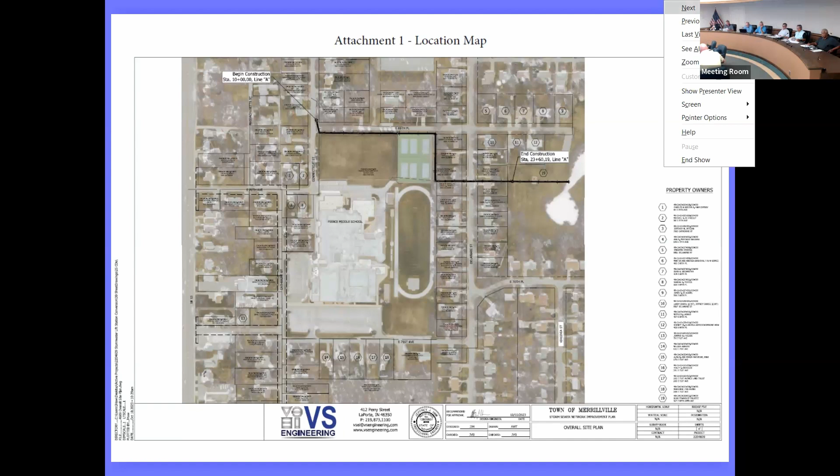Like Matt Lake said, I'm Tim Hollinsworth with VS Engineering, and we did the design of this project. On the screen you'll see the location—it's just east of Broadway, State Road 53, and north of 73rd Avenue in Merrillville. Like Matt said, this runs down north of the middle school and connects to Skinner Pond. I'm waiting to get that page—next slide, please.

Very similar to what Matt said, the summary is to eliminate that lift station and replace the infrastructure with a new pipe, making it into a gravity fed system.

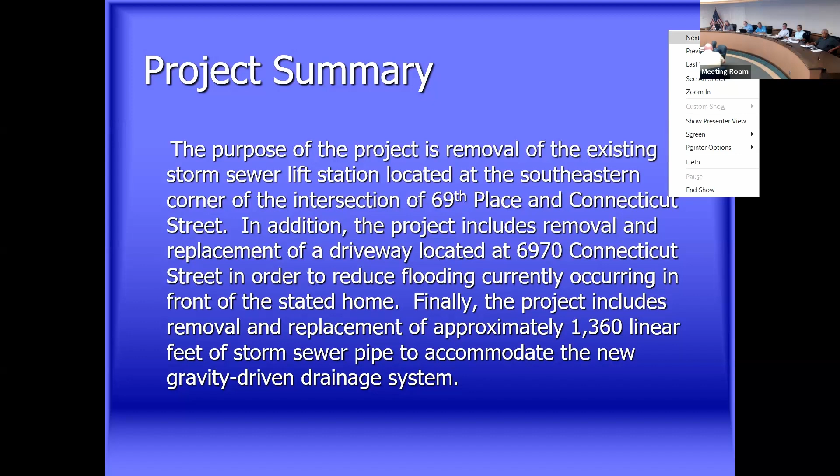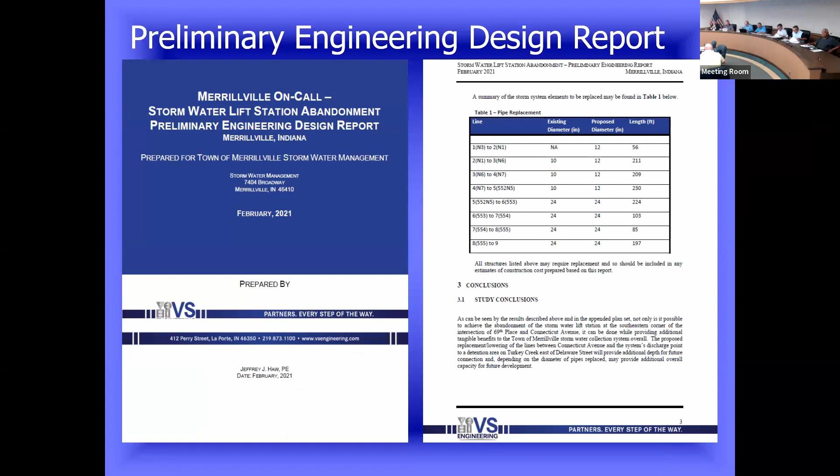On the screen now is the request for the funding application. This gives a lot of the same details we've provided and listed here. And this is the engineer's report we've done to verify the need and the proper solution. Next is the construction estimate that Grimmer provided, utilizing the quantities we calculated throughout the design process.

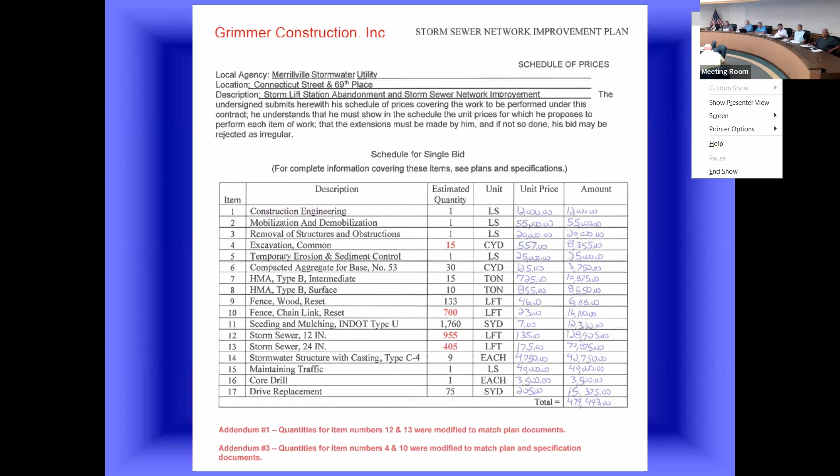One thing to note is that we are tying into existing structure. We're not replacing unnecessary things. We are trying to utilize what's out there and do best by the dollars provided.

Some additional information captured here is some drainage areas that were really poor that the pump wasn't able to capture. Putting in this gravity fed system will help capture those, helping these two residence locations on Connecticut Street to keep it flowing. It'll also help preserve the infrastructure of the street by keeping the water off of it.

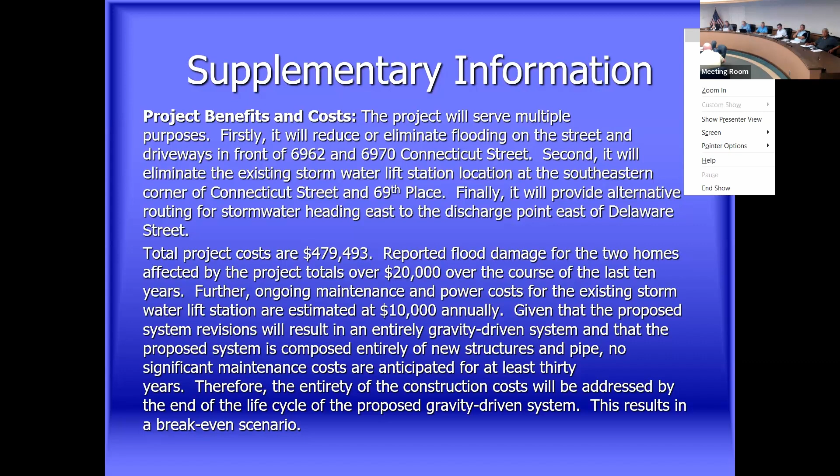Another thing to note is the benefit of eliminating the lift station, saving the town revenue on ongoing maintenance and eventual complete replacement of that as well.

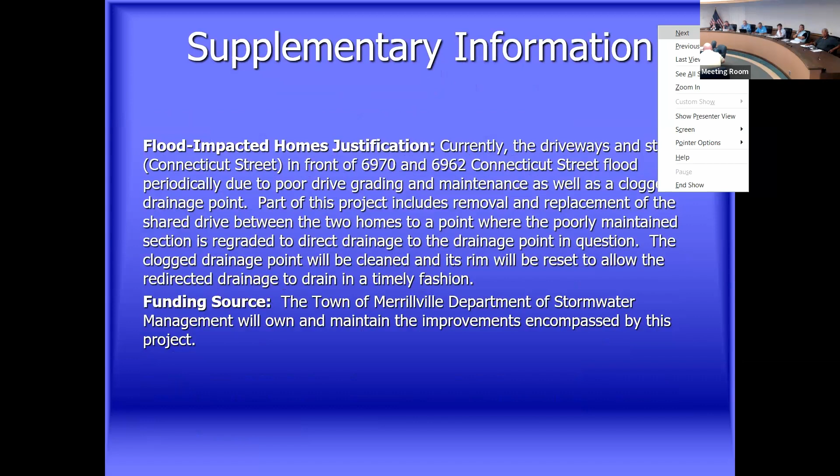Other things being taken into consideration are some of the residents' drives that are impacted by this flooding. So not only is it helping the features of the road, it's also helping those residents preserve their infrastructure. And the town is already committed to doing this, with it already under construction.

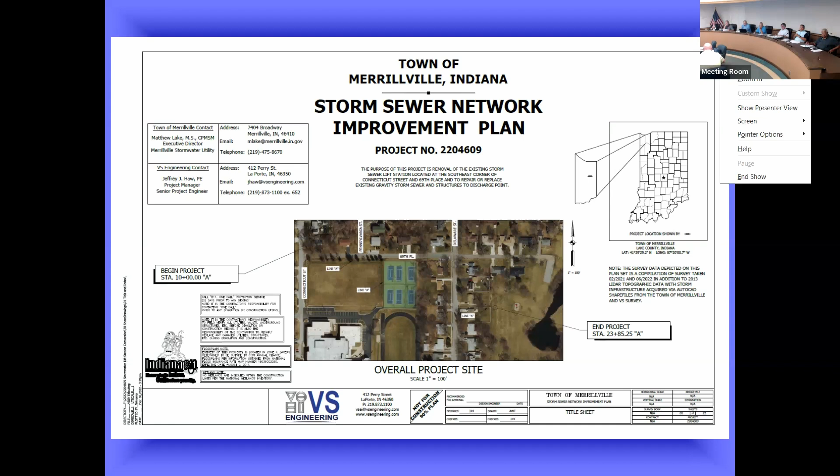So now in front of you are the plans for this project. This is the title page we've used, highlighting the location. And the next slide is going to show more detail of the route.

We worked closely with the school system and their board, and they were generous to grant us easements in order to relocate some of the infrastructure, but they want us to be east of the tennis courts.

We've also invested our stormwater dollars into all the studies and engineering to this point. The engineering's done — correct, it's all done. Grimmer's already on site and constructed. So we're asking for 50% of construction costs.

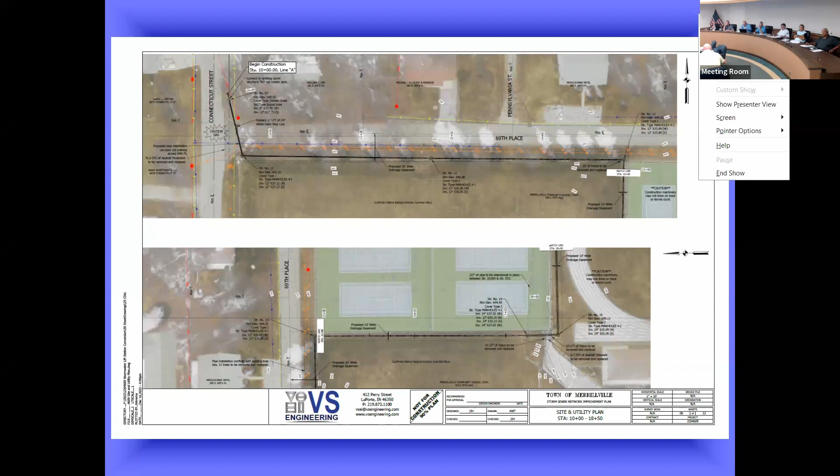Also on that easement discussion, we've worked with Ross Township as they own the park. So we've worked with them on getting the easement there, as Matt Lake stated with the school, ensuring the school's property isn't damaged with the tennis courts there, and replacing in kind the fence that will have to be removed.

So Matt, the township and the city — this is kind of the DMZ, for lack of a better description. We're abutting Ross Township and the town of Merrillville. We're going through school property first, then crossing Delaware Street into another property where Skinner Pond is, owned by Ross Township trustee Eric Blackman. They've been great to work with.

So is the township portion of this where the new water's going, or is this helping the new water go to Ross Township? It was already going there to begin with. Okay, so we're resetting the infrastructure so it actually has the elevation to drain by gravity.

We're trying to follow the exact same path, other than on the other side of the tennis courts, making sure we had easements into the Skinner Pond area. So we're taking the existing system and resetting it with the elevation so it can go gravity instead of relying on this utility valve. Like Tim said, we looked at lift stations and other options, but the cost and reliability just didn't seem like something we wanted to go in that direction with.

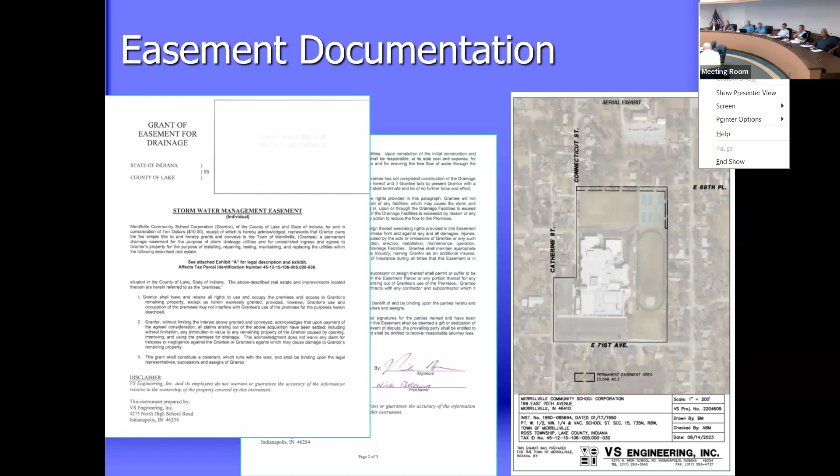Thank you. And last slide, please. So the existing sump discharges to where? Same place, same place.

What's the exact orientation, where does Skinner Pond discharge to, where does it outflow to? The pond goes north into Merrillville High School, travels through their infrastructure, and ends up at a railroad corridor where it outlets, just on the west side of I-65.

So there's really no differential between what's received now and what's going to be received. It's just going to reliably get from the system, from A to B.

Without flooding everybody in that intersection and the school, and making sure they have access. Has it been flooding because the pump station hasn't been working correctly? That's primarily the issue. Who's responsible currently for that pump station working correctly?

That was kind of a makeshift system that was put in by Public Works many years ago. So we're trying to correct something. I don't know why they did it and why they didn't invest in something like this. We did have another engineering firm look at this and they said it was almost impossible to do.

We hired VS to do a study too, because I didn't believe it. And sure enough, they ended up saying yes, you can gravity this from A to B. So reliable drainage is key for this area, not only for the school, but for the residents.

And then you've got Merrillville High School just on the other side, so you've got a lot of moving parts. Merrillville High School is to the north. Can I get an aerial put up? I just want to see where it is.

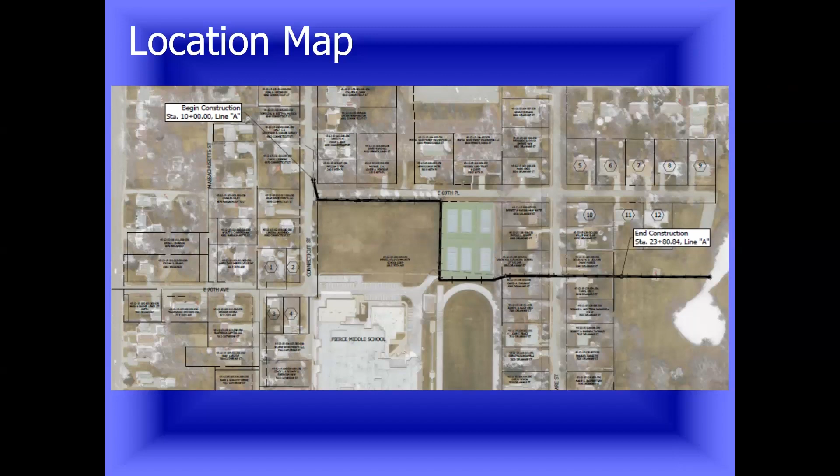You guys done, or is it question time? You're putting a new gravity storm pipe in, is the pipe size increased as part of this? In sections, yes, but that's mainly to help the slope. Any other questions for these young men? Outstanding, nothing for me. No, that was fine. Thank you very much.

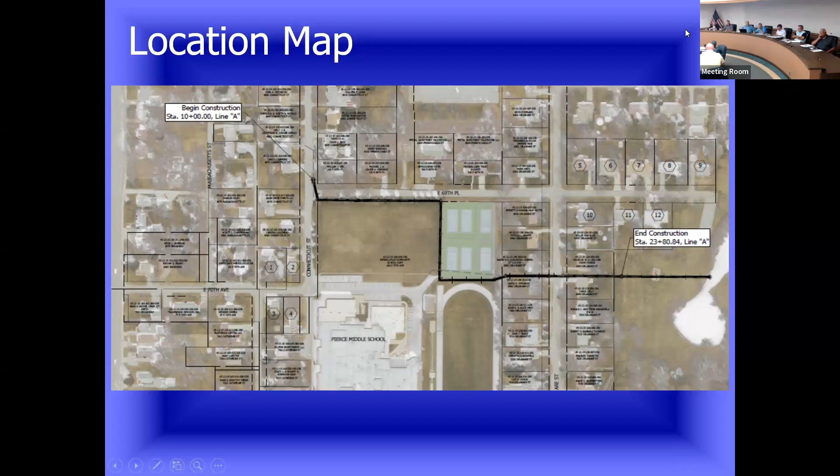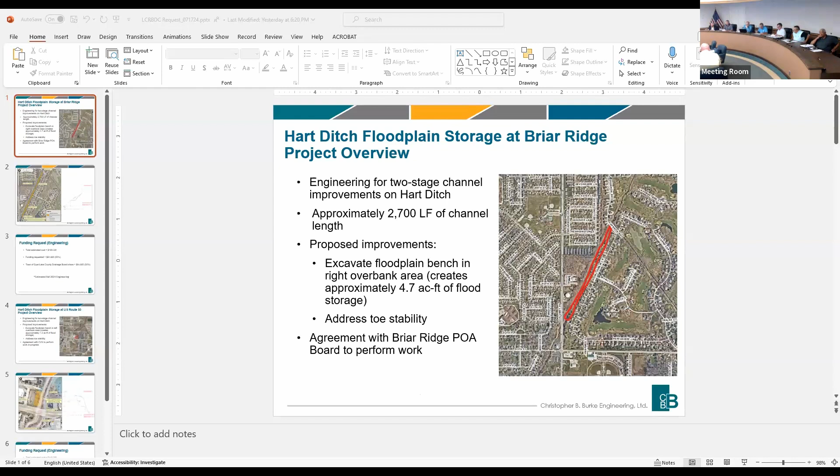Moving right along, next up, representing the Town of Dyer, engineering for Hart Ditch floodplain storage at Briar Ridge and floodplain storage at US Route 30. Are these two separate projects or packaged together? They're two separate projects but will probably be packaged together. They did a study about two-stage ditches continuing from the work done by Town Hall, and these were the areas identified as most beneficial given property rights and accessibility. I'll let Thomas, who already has it up and running, present.

Good evening, I apologize for not being there in person. I'm Thomas Burke with Christopher Burke Engineering. So what we have is a map of one of the two areas we'd like to pursue. The two-stage ditch project, as Dan mentioned, was successful before near the town hall.

Calumet Avenue is the north-south street, 213th down here, Briar Ridge Country Club and Main Street up here. We're talking about a 2,700 foot length along the east side of Hart Ditch on Briar Ridge Property Owners Association land. We've got about 1.5 million gallons of new storage created by this project. We'd also address stabilization of the toe of the ditch, which has been eroding, and we've talked with the Property Owners Association, who agreed to allow this work inside that easement. The benefit shown here is a narrow area to do the work.

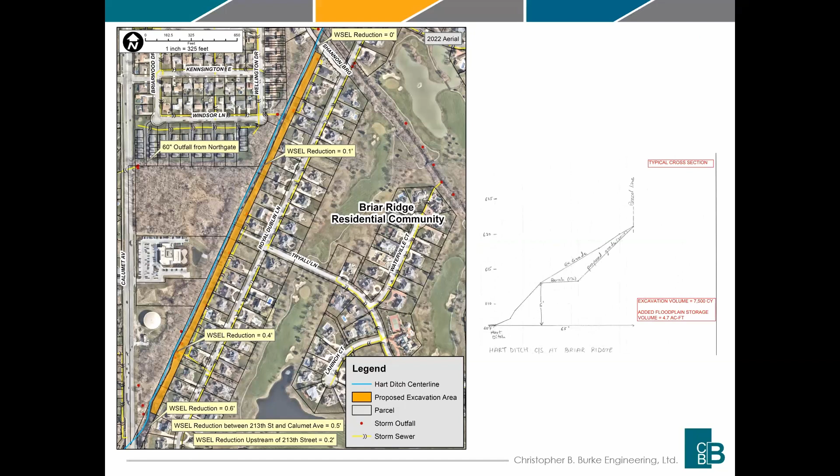And you've studied this, because the top of that does look a little iffy to me. It seems like it's making it worse—right at the property line, you're making a steeper slope. We are, but it was also going to be planted with vegetation that will hold it. It's certainly not as steep as some other areas in the ditch, but we are confident with this grade that we will be able to hold 3-to-1 and hold the bank easily.

Okay gentlemen, any other questions with this particular? From the center of channel to the edge of the property owner's land, what is that distance? 65 feet on average. To the center? Yes, more or less, though it depends—there's a channel that comes in here. In general, and I apologize, that's 65 feet from the edge of the bank, not from the center line, so it's probably like 75 feet from the center line of the ditch out to the property line.

Are you doing anything on the west side of it? We are not. We have looked at this. We had proposed doing, as Dan mentioned, we looked at a number of areas throughout Dyer and selected the most beneficial ones, as well as the ones where we could work with the property owner.

So we looked at this triangle piece here that the town owns. However, the town wants to leave this for another water tank—they believe they need to provide a future water tank here, so they didn't want us excavating this. This is the oncology center where there's already a detention pond right here. The town had looked at actually purchasing this property to make it an even wider area over here. It's since sold, but we've contacted the new owner about possibly working with the town to create more storage—that's ongoing. Some of these other areas get too narrow to really do much with, so we looked at maximizing everywhere we could, and we're presenting right now what we believe are the two best areas.

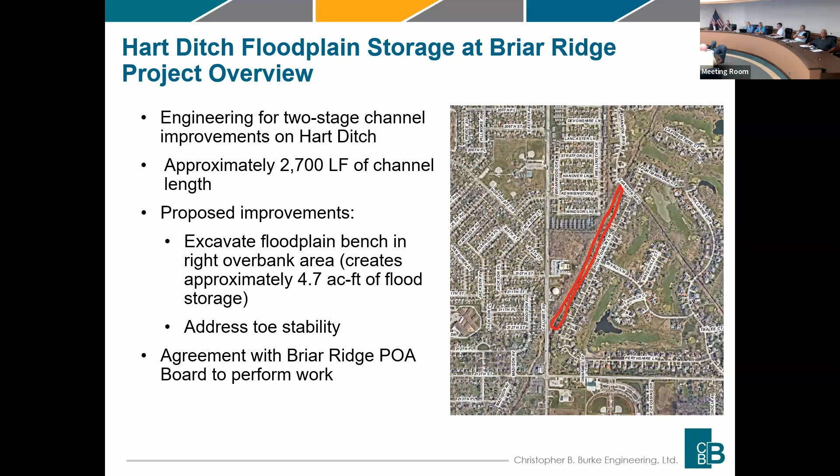All right, Mr. Burke, moving right along. The next one—here's US 30, here's Dyer Town Hall, here's... Brian, help me out, what is this? Sorry, Hart Street. Thank you. So we're just entering into the town of Dyer on US 30, the north side.

This is where we did the previous project, the two-stage ditch from the hospital up to about where the town hall pedestrian bridge crosses from town hall to the event center. This is looking at the CVS property right on the west side of Hart Street.

We looked at trying to extend this along the east side, just south of Calumet Street, but the property owner was not willing to work with the town at this point, and we didn't want to take it to where it would have to be condemned or anything else. We decided to just see if we could work with CVS, and CVS said yes, they're willing to work with us—give us details and we'll look at proceeding.

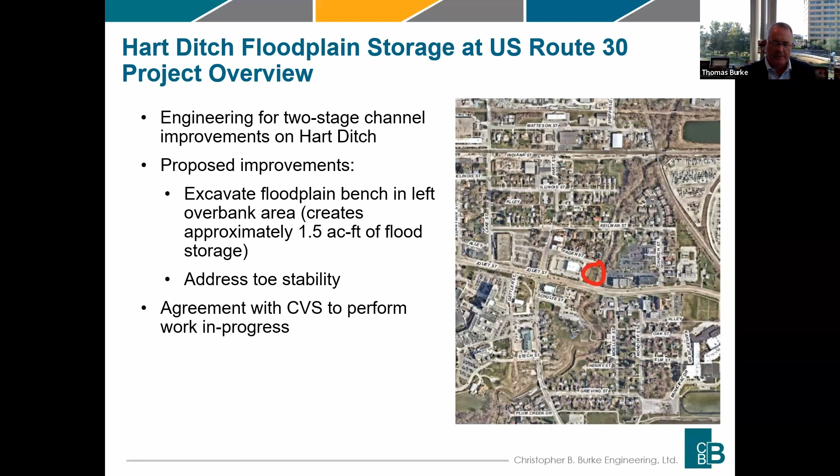So there's extra area there. This is providing 1.5 acre-feet of storage, again addressing the toe stability. CVS has a detention pond shown right here that outlets to the ditch. We're talking about taking the area that's not being used on the CVS property and expanding the ditch. We'll leave the detention pond here, but we'll be excavating this area for the entire length, from here to Fagen Street.

This shows that the reduction is 0.2 feet of water surface elevation for the 100-year event at Hart Street, and the same thing on the downstream side, then ties into our other two-stage ditch project.

Can you go back to that one, Dan? Does it make more sense to use that shaded area than the area just south of 30? I don't know if that's a structure or just trees. This area here is part of the town hall. Oh, that's a building? Yeah, the building's here, right? But there's a gazebo here, and a couple of trees with a walking path along it.

There was more potential for making it longer and wider here than just doing this small stretch. So you're looking to store it downstream. I was just thinking, before you hit the structure of US 30 and that bridge—because I'm sure, not having seen it, there are pillars in the middle of that ditch—does it make more sense to do work on the south end of 30 to open that up, or to provide more storage at that end, just as an idea?

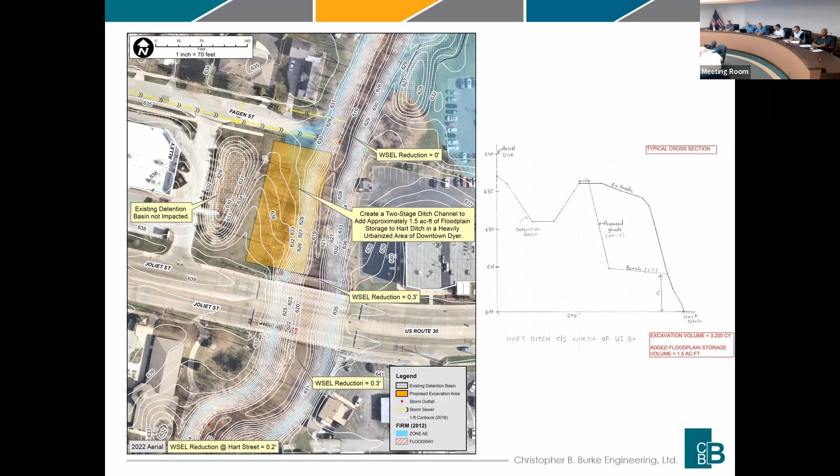Oh, Eric's here from Structure Point, will be doing the presentation. And he'll introduce himself and show us the Bears insignia and giddy up. Put on my glasses so I can see. We all do that.

All right, we're ready to roll. Eric Wolverton with American Structure Point. Also have John Kennedy here with American Structure Point, Greg Bukowski, City of Crown Point, and Doug Bright also with the City of Crown Point.

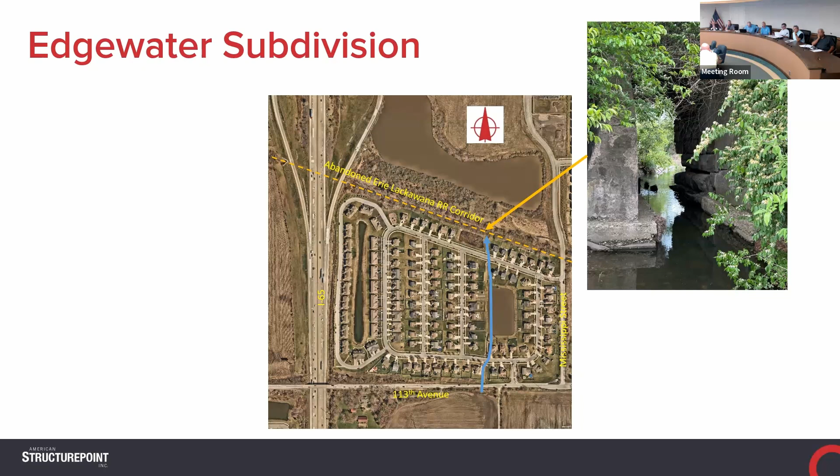So this area has experienced flooding due to this restriction of the railroad bridge. The city, within the last year or two, has come to gain control of the right-of-way where the railroad used to exist. The next few slides indicate some of the flooding that's occurred in this subdivision due to this restriction.

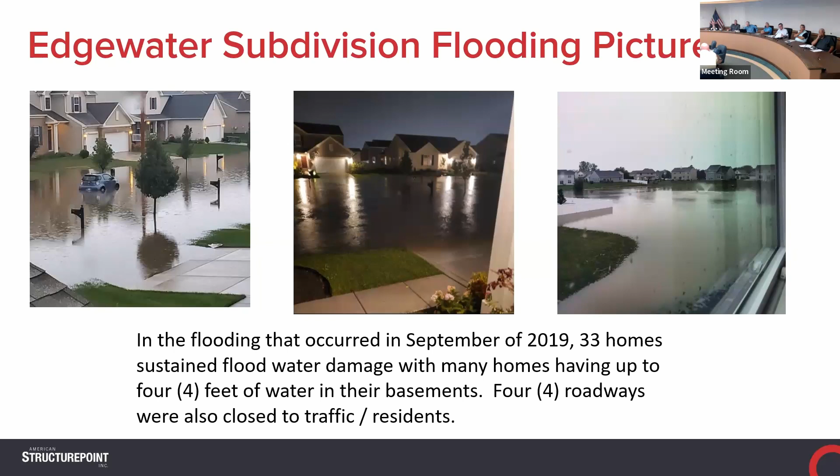They're particularly still building more houses though. This particularly is in late September 2019. There were 33 homes that were impacted by the floods. Several of the homes received 3 to 4 feet of water in their basements. It also impacted 4 roadways that had to be closed, impacting access to emergency personnel, et cetera. Here are a few more pictures.

Who did the original engineering on this? Let's go back to the original aerial and say how much of this water was coming in. This is all recent, and you have all this water from these new developments going into the hole that is the railroad restriction. I mean, that's not new, obviously.

Okay, I can't cuss in this, so go ahead. Yeah, correct, it was obviously there a long time ago. And as I mentioned earlier, the city didn't control that right-of-way, so I had no ability to go in and remove that bridge and upgrade it. Right, but they had the approval rights of building all the houses, correct?

Yes, and those subdivisions were designed in accordance with the stormwater ordinance at the time, back in the early 2000s. Duly noted. So the request before you tonight is for preliminary engineering, which would include some minor topographic survey so that hydraulic modeling could be done, and then full design and bidding of the project. The request as it stands is an 80-20 split, 10,000 from the city, 40,000 requested from the board.

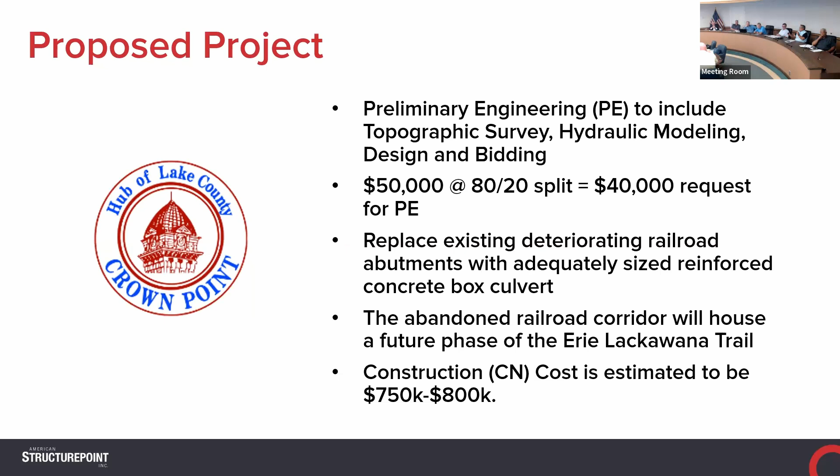Okay Eric, can you go back to the aerial please, the one that shows I-65 again? Dan, I'm going to ask you a question. We've already talked over the last, I don't know how many years, about the west-to-east flow down in this part of the watershed, that Beaver Dam Ditch went under there. Now I'm just hearing that there's another culvert under I-65 going from the subdivision on the west to where the star is. Is that how I'm understanding that?

I'm assuming. So now we have another one under I-65. But Big Beaver Dam Ditch is the largest tributary. I understand that, but my question is, how many more are down there, that all of a sudden when you keep building more and more subdivisions you're forcing stormwater underneath I-65? I just want to make sure we're ahead of these, as opposed to having more of these, oh shiitake moments. What's the size, Eric, what's the size of the culvert underneath 65 here, if you know?

One of the things you guys can help us out with is how many other culverts are under I-65 in the city of Crown Point, because we have all that growth there in economic development, which I'm a big fan of, but it's all going east, and this is all ending up in the Deep River. We just need to make sure we see how this thing is setting up, how many of those points are available, and whether or not there can be additional storage capacity, to not just keep forcing this stuff further down the path. That's kind of what the goal is here.

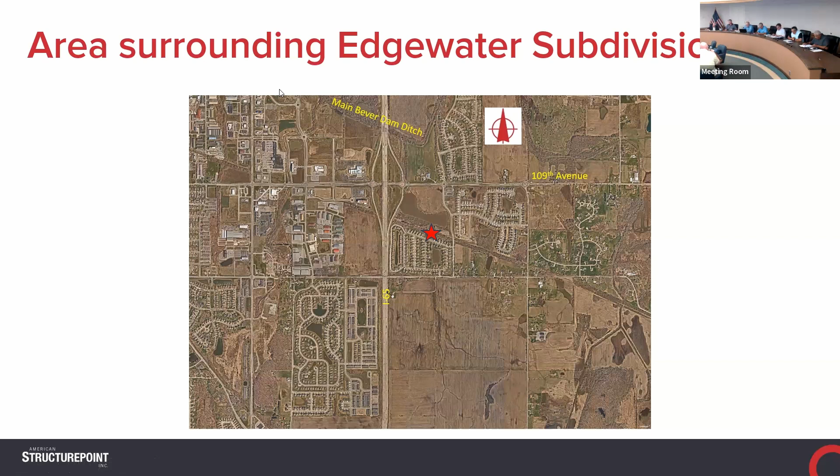Mr. Chairman, I would like to make a motion to approve resolution 2024-09 and an interlocal agreement with the Lake County Parks for 2024 funding for the Little Calumet Conservation Collaborative in the amount of $295,000, subject to final draft and approval by the attorney, executive director, and chairman.

There's a motion. Is there a second? Second. And a second.

This is the third year of the funding request. They actually requested two years, but as we've historically done... and some background on who's part of this collaboration?

The Little Calumet Collaborative includes the Wetland Initiative, Audubon, Lake County Parks, us, and the Nature Conservancy. We fund it, but they also go to NOAA to get funding, and they get Chi-Cal River funds. What they do is basically use our funds to leverage national funds and endowments to do the work that they're doing.

They've given presentations. I think the latest was May or June, where they updated us on what they've done by Martin Luther King and Grand Street, what they call the Chase Street complex, as well as the Highland Rookery. What these funds will do is continue that work, because as we know from our own mitigation work, there's a period of time where you have to make sure invasive species don't take hold.

You plant the plugs that need to be planted and add to that ecosystem, as well as doing some outreach and grant writing to get additional grants so they can do Hatcher Park and the Marshalltown complex, which is in the area between Martin Luther King and Central Avenue. That's their next phase of where they want to develop.